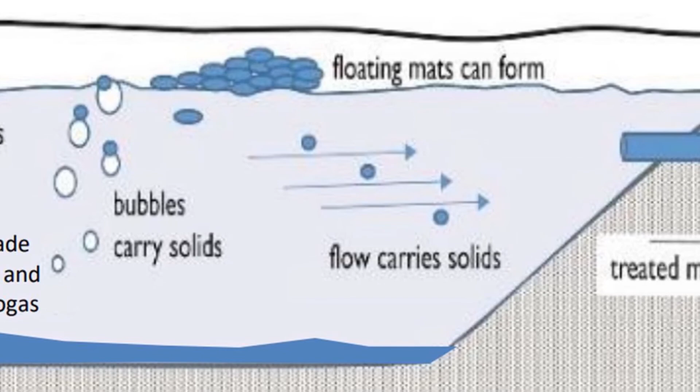Abet Company started on assisting in biogas projects construction and have gained significant knowledge and understanding on biogas concepts. Biogas is the mixture of gases produced by organic matter in the absence of oxygen, anaerobically. Primarily, it consists of methane and carbon dioxide. Biogas can be produced from raw materials such as agricultural and human waste, manure, municipal waste, plant material, sewage, green waste, or food waste.

Abet Company builds lagoon-type anaerobic biodigesters to contain the biogas produced. It is more economical, easier to repair, and may not require the wastewater to be heated, stirred, or pumped. The aged sludge and waste overflow of the biodigester can be used as fertilizer for rice fields and for watering the plants.

Aside from using it as a fuel for heating, cooking, and incineration, biogas can be compressed after removal of carbon dioxide, the same way natural gas is compressed to CNG, and used to power motor vehicles.

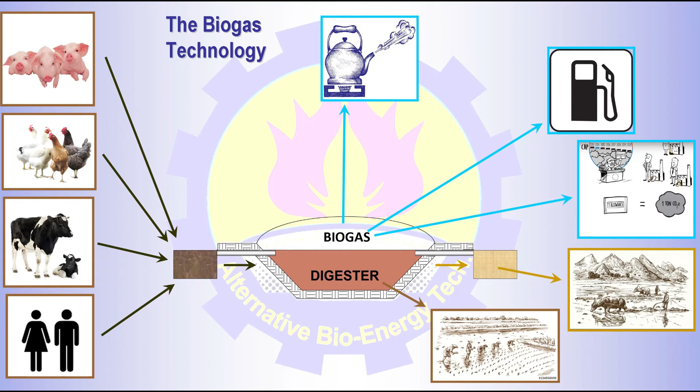In other parts of the world, the Clean Development Mechanism allows emission reduction projects in developing countries to earn certified emission reduction credits, each equivalent to 1 ton of carbon dioxide. These certified emission reduction credits can be traded and sold, and used by industrialized countries to meet part of their emission reduction targets under the Kyoto Protocol.

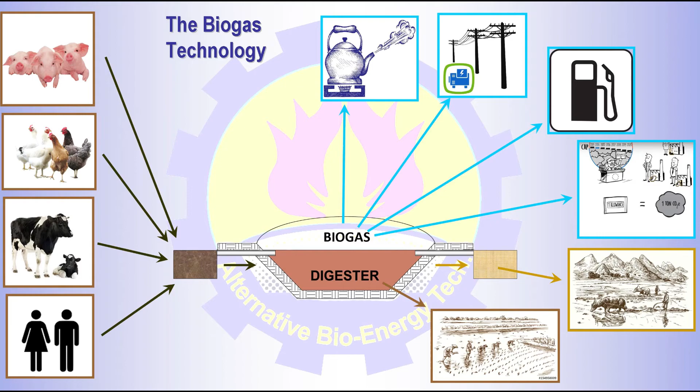With decades of experience in biogas production and installation, Abet Company became an expert in utilizing biogas for power generation. Through biogas, energy is produced in the form of heat, light, and electricity.

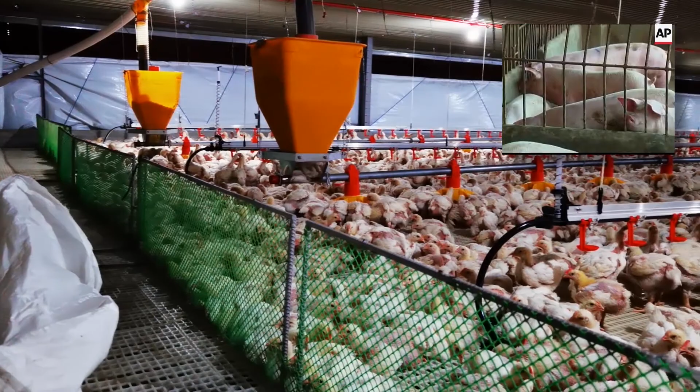Organic waste is transformed into high-quality fertilizer. With this, the volume of disposed waste products is also reduced. Since better sanitation is encouraged, there is an improvement in hygienic conditions through reduction of pathogens, including worm eggs and flies on poultry farms. Workload is reduced in firewood collection and liquefied petroleum gas, or LPG, for cooking.

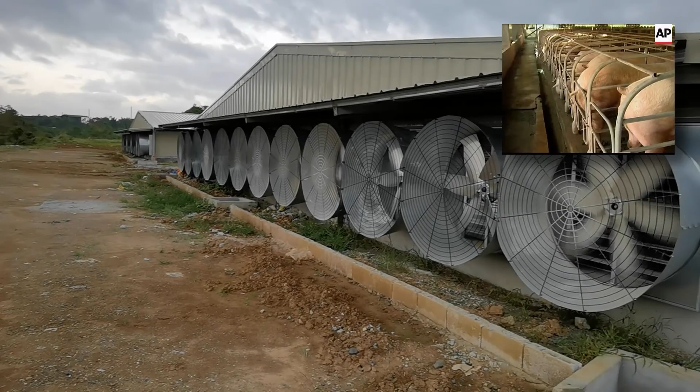Microeconomical benefits through energy and fertilizer substitution, additional income sources, and increasing yields of animal husbandry and agriculture. Also macroeconomical benefits through decentralized energy generation, import substitution, and environmental advantages through protection of soil, water, air, and woody vegetation.

The 5,000 heads of this farm can generate around 100 kilowatts of electricity to power the entire operation of this farm.

Abet Company can help you build your biogas facility, as the working crews have 2 decades of experience on more than 100 biodigester installations here in the Philippines alone.

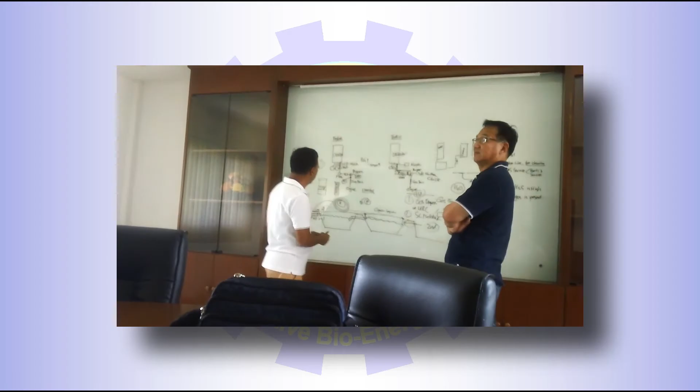Abet Company started on assisting in biogas projects construction and have gained significant knowledge and understanding on biogas concepts. In the first decade, beginning the year 2000, Abet Company has supervised and managed construction of biogas facilities in nearby Asian countries: 5 biogas facility projects in Thailand, 1 biogas facility project in Fujian, China, 1 biogas facility project in a palm and cattle industry in Indonesia, and 1 biogas facility project in a palm oil industry in Malaysia.

Since then, Abet Company have constructed several turnkey biogas projects in the Philippines. At first, Abet Company installed biogas-converted engines from Don Hardy Race Cars, a high-speed race car engine manufacturer in the United States.

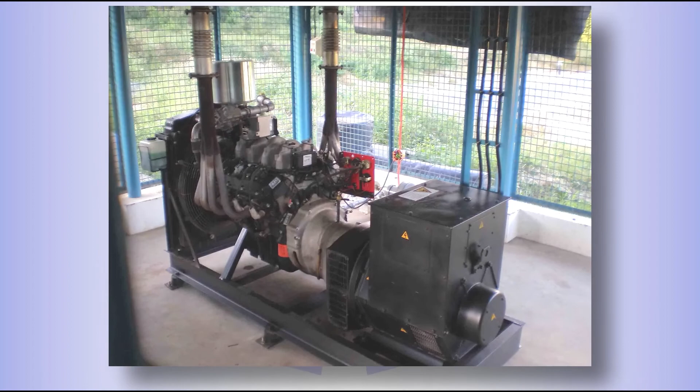Available in 75 kilowatts and 100 kilowatts, the biogas-fueled V8 engine comes with a gearbox and speed reducer, connected to the alternator.

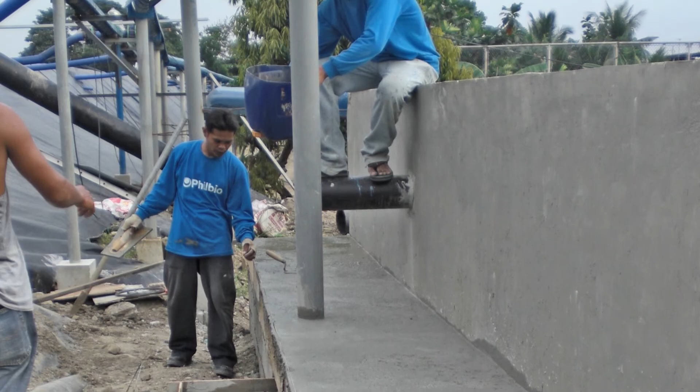Within the years 2006 and 2008, the United Nations Framework Convention on Climate Change, or UNFCCC, in pursuance to the 2012 Kyoto Protocol, with the support of Trading Emissions plc in the UK, Abet Company have constructed and commissioned 31 build-operate-transfer biogas projects in the Philippines under the Philippine Biosciences Company Incorporated, or PhilBio. During this decade, the anaerobic biodigester was described as a Covered In-Ground Anaerobic Reactor, or CIGAR, as described in the news.

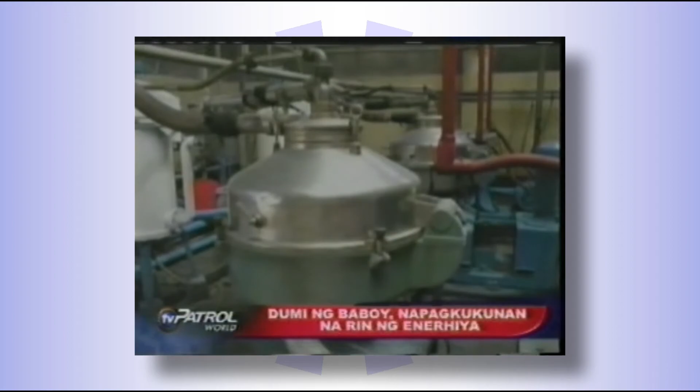We want it to come out of the digester, lose the moisture through the pipeline system that we put up, so that it can run the electric genset. Halos 80% ng electrical needs ng babuyan ay nanggagaling sa kanilang industrial waste.

Sa layuning palaganapin ang CIGAR biogas system, itinuturo na rin ito ngayon sa mga barangay.

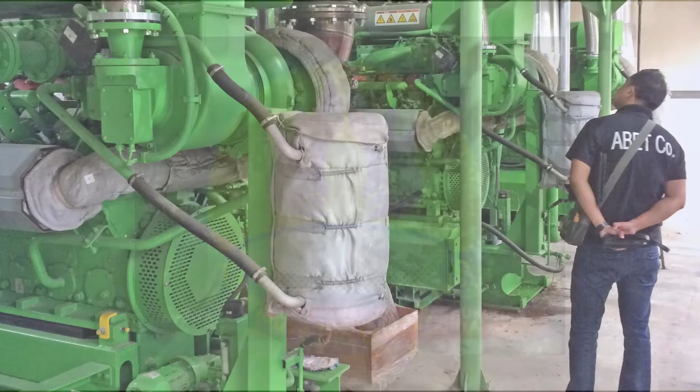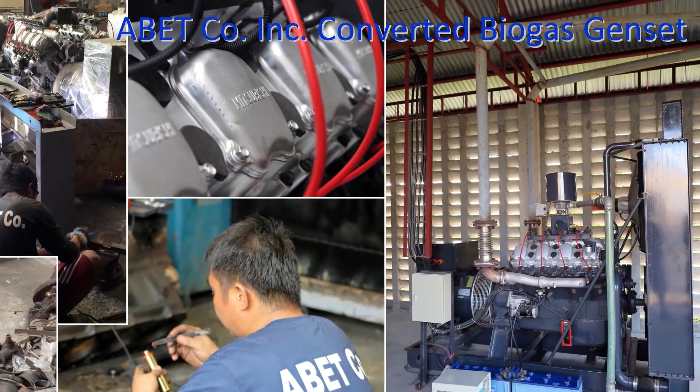With years of experience in operation and maintenance on different generator set brands, Abet Company successfully invented its own type of converted V8 diesel-fueled engine into a spark-ignited biogas-fueled engine, directly coupled to an alternator. Abet Company installed the converted engines on selected biogas projects with a generator set, rent, or lease scheme, with an operation and maintenance contract.

In 2010, Abet Company was officially established and have installed more than 100 biogas projects. Among the new biogas projects are owned by Charoen Pokphand Foods Philippines Corporation and Universal Robina Corporation, which includes the Robina Farm 23-layer chicken farm in Naic, Cavite Province, with 3 units of 200 kilowatts MAN engines-powered biogas gensets.

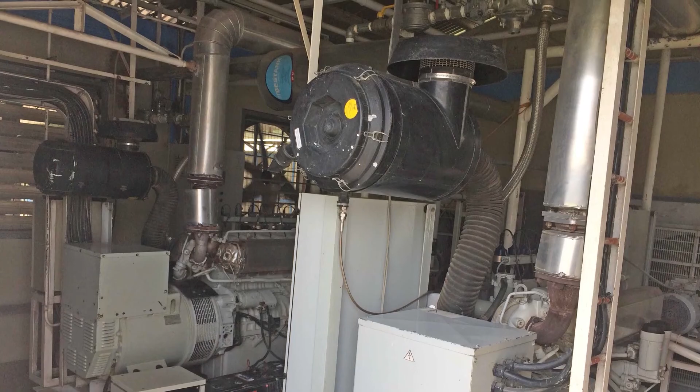In 2016, Abet Company began to offer and provide complete farm construction services, starting with a hog farm named Blue Lace Farm and a poultry farm named Strongman Farm, all located in San Ildefonso, Bulacan.

Abet Company has all the equipment and tools needed to complete an entire pig or poultry farm with a biogas facility. Heavy equipment includes 4 units of backhoes, 2 units of roller bulldozers, and 5 units of dump trucks.

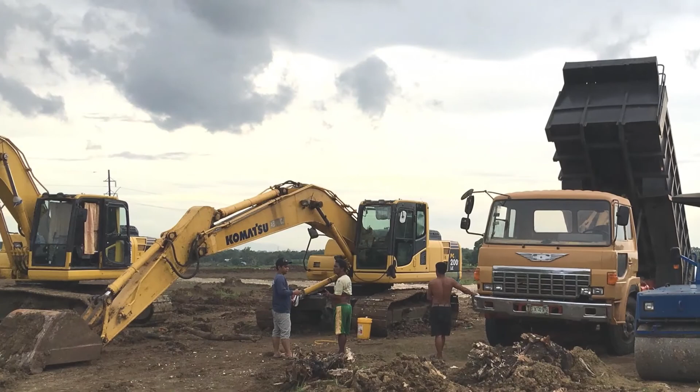In 2017, Abet Company constructed its own pig farm, the Abet Sansatero Farm Incorporated, located in Barangay Pitombayog, Mayantoc, Tarlac, and now operating with a total population of 4,800 heads, and now ongoing expansion to be 9,600 heads total, upon completion on the 4th quarter of 2021.

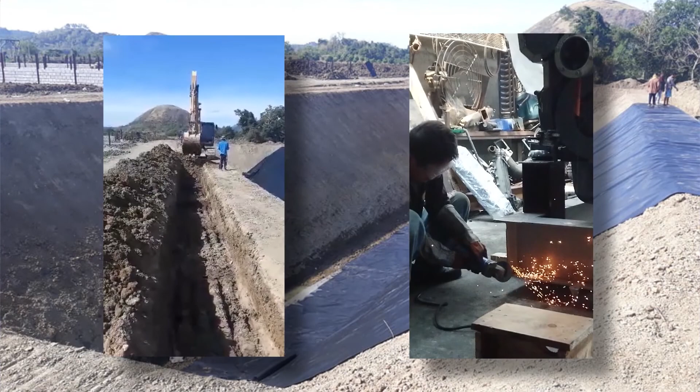This farm is Abet Company's model farm for biogas facility and for biogas generator sets testing ground. With Abet Sansatero Farm Incorporated, Abet Company has gained the confidence of clients for a complete animal farm construction and biogas facility installation.

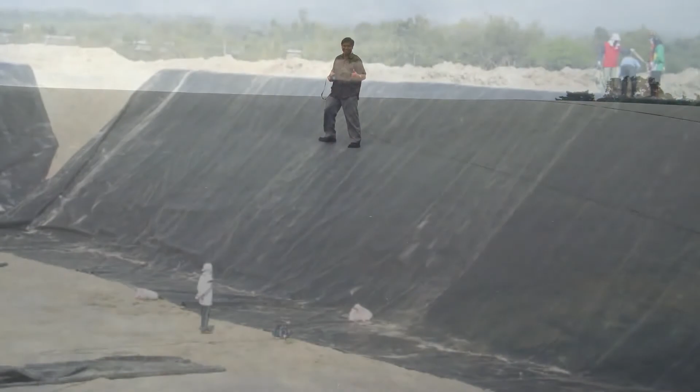Abet Company has the desirable biogas-related items, offers, and options you need for a viable biogas facility that works. In the lagoon-type biodigester, the black sheet is made of imported, high-density polyethylene, or HDPE liner.

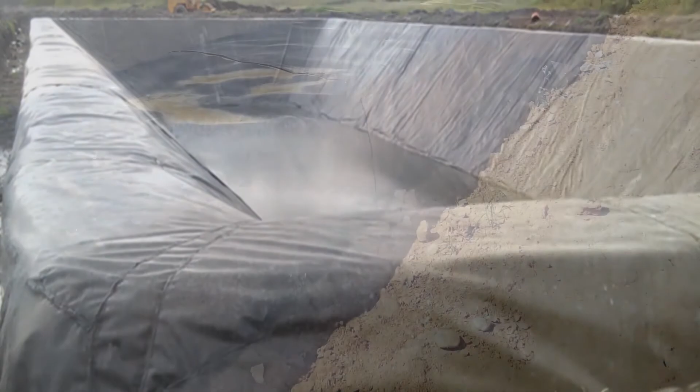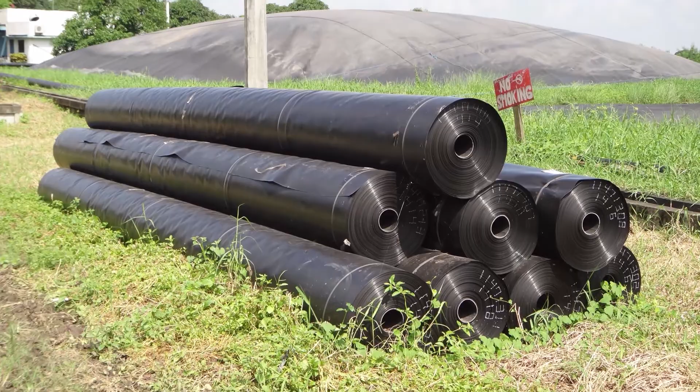Abet Company offers material and installation of HDPE sheets in thickness of 0.75 mm, 1 mm, 1.5 mm, and 2 mm.

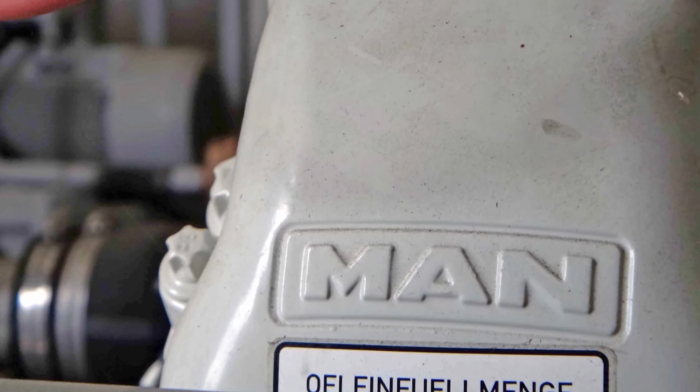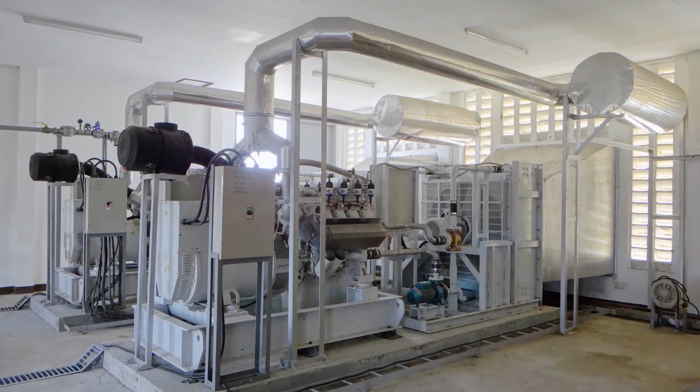For capacities over 100 kilowatts, Abet Company offers biogas gensets powered by MAN engines, exclusively made in Germany, especially designed for continuous power, 24/7 operation. The Mecc Alte dynamo, or alternator, coupled on these engines, are made in Italy.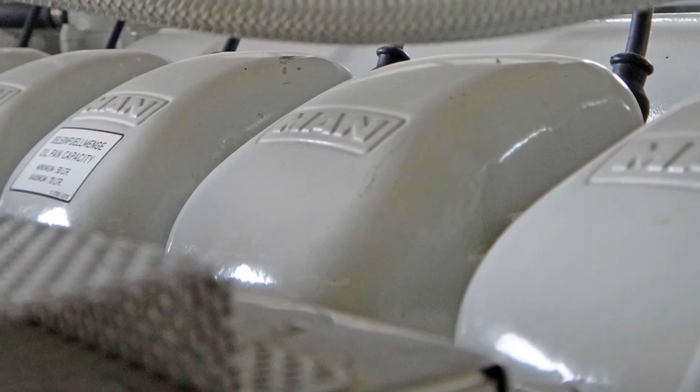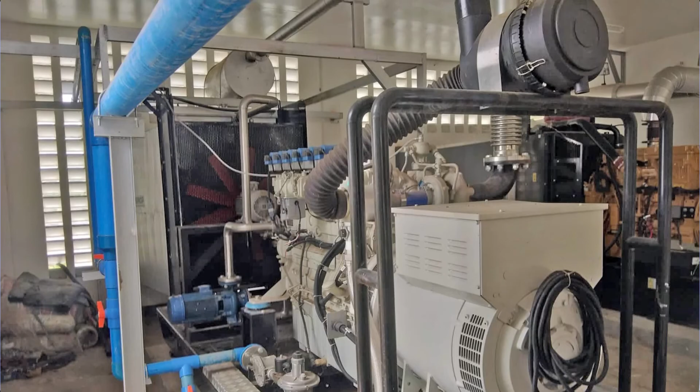The turbocharged, spark ignition, MAN biogas engines are available in the following capacities. The 130 kilowatts MAN engine, model E2876TE302, is made of 6 cylinders in line, and it is coupled with a 192 kV-ampere Mecc Alte alternator.

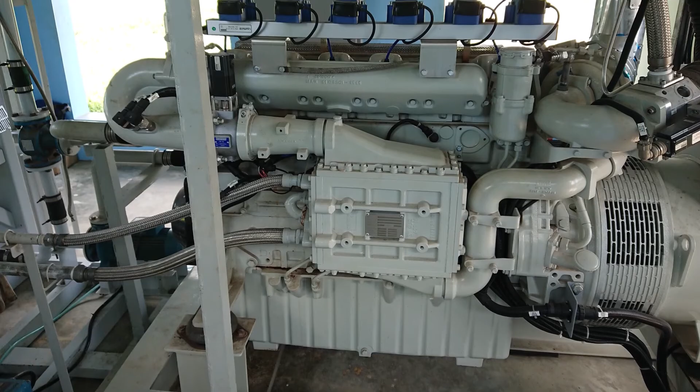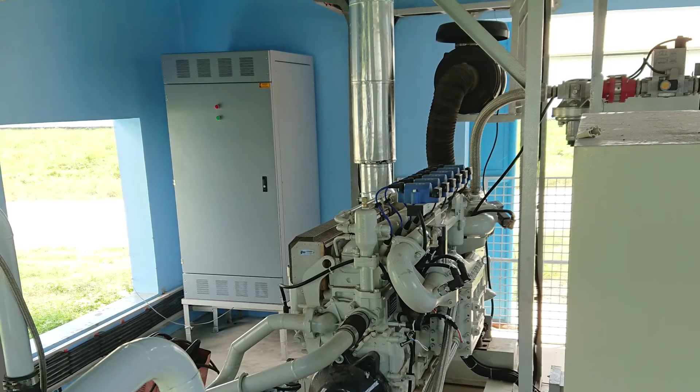Available in 200 kilowatts is the turbocharged MAN engine model E2876 E302, made of 6 cylinders in line, and coupled with a 270 kV-ampere Mecc Alte alternator, is the best seller for Abet Company.

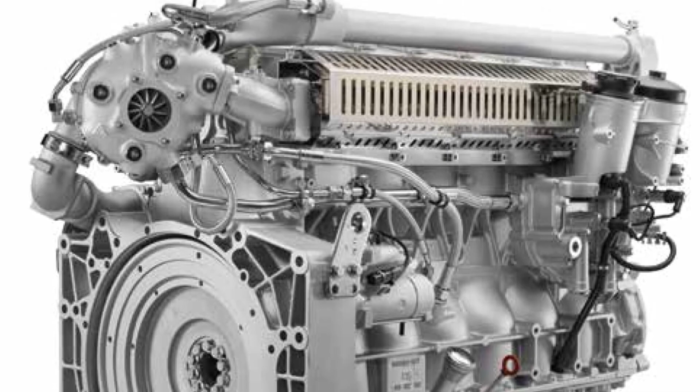The 250 kilowatts model E2676 is also made of 6 cylinders in line, and it is coupled with a 300 kV-ampere Mecc Alte alternator.

Available in 390 kilowatts is the model E3268, made of 8 cylinders and 90 degrees V arrangement, or V8, and it is coupled with a 540 kV-ampere alternator.

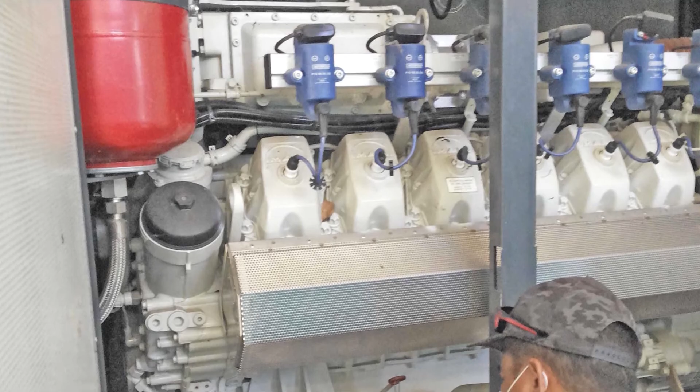And available in 580 kilowatts is the model E3262, made of 12 cylinders and 90 degrees V arrangement, or V12, and it is coupled with an 816 kV-ampere alternator.

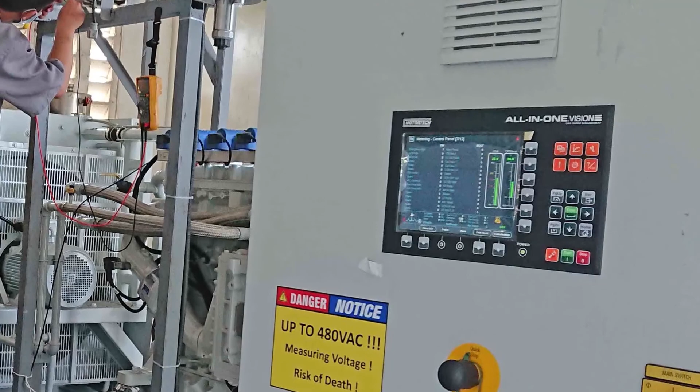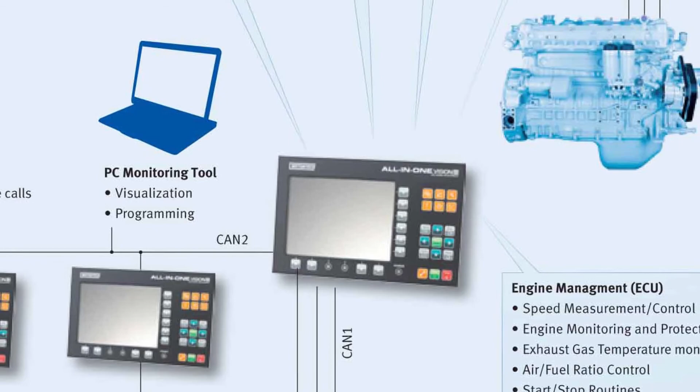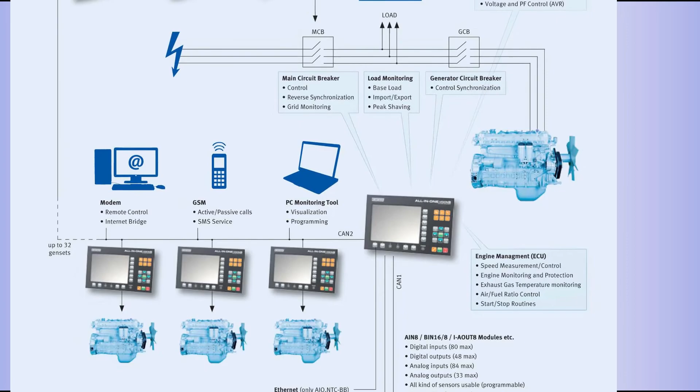The MAN biogas engines come with a state-of-the-art, all-in-one, Motortech biogas genset controller from Germany. With a large separate display, the Motortech all-in-one controller can be connected with up to 32 gensets and can integrate functions such as fully automatic synchronization or an uninterruptible back synchronization in mains parallel operation, as well as integrated solutions for multi-unit operation, load sharing, or the automatic operating hours adjustment of the individual units are standard features.

The Motortech Ignition Controller, or MIC, in versions 3, 4, and 5, provides reliable combustion on engines up to 20 cylinders, even with the weakest or fluctuating caloric values of the biogas.

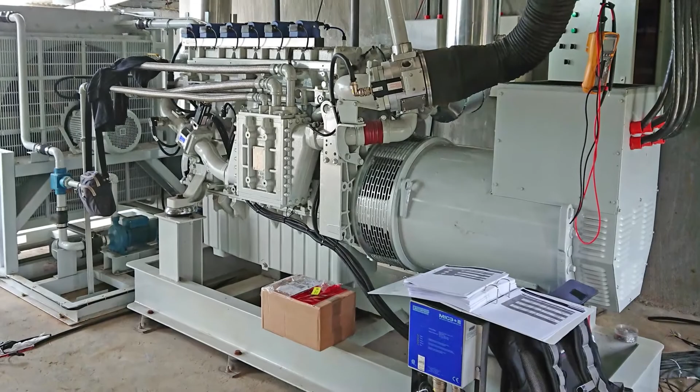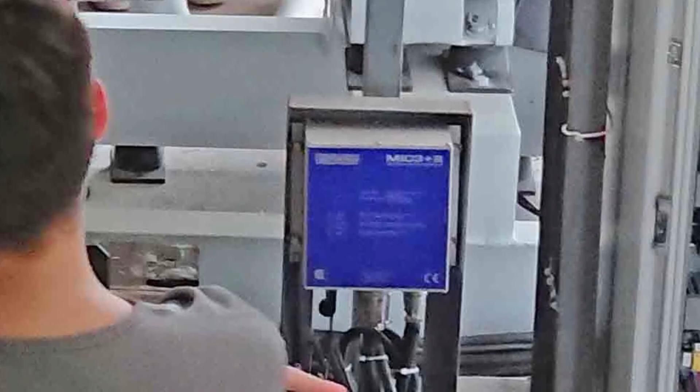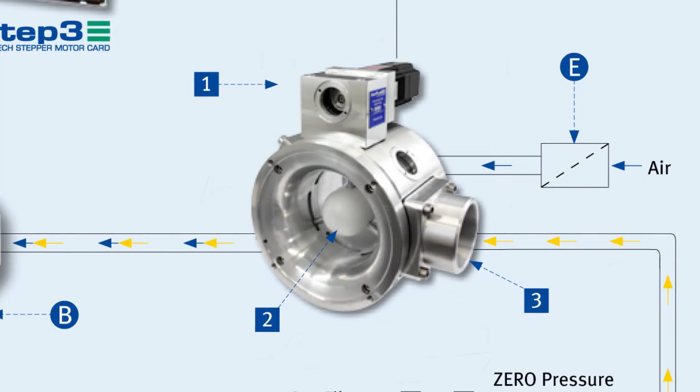The Motortech VariFuel version 2, specially designed for use with biogas engines, is a high-tech variable Venturi-type air-gas mixer that can constantly adjust to any fuel changes. The geometry of the built-in fuel ring, adapted to the application, ensures improved engine starting behavior and control of the air-gas mixture in special gas operation. Coupled to an air-fuel ratio controller, lean burn or stoichiometric, it precisely regulates the mixture.

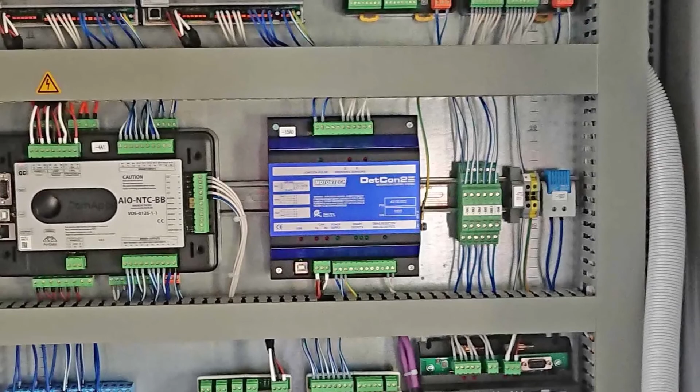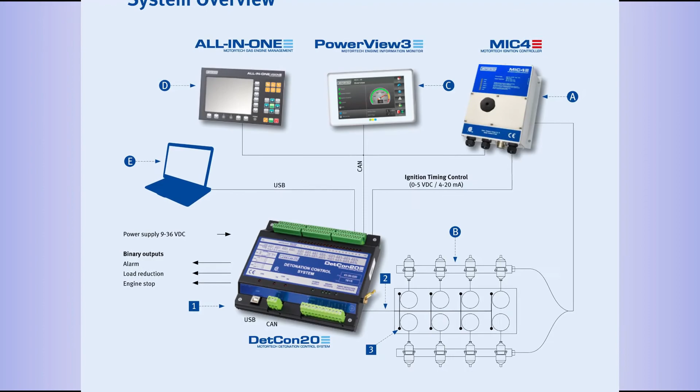The Motortech Detonation Control System, or DETCON control unit, provides complete protection for biogas engines, even with up to 20 cylinders. The microprocessor control system detects any knocking at an early stage and sends an analog signal of around 4 to 20 milliamperes, or 0 to 5 volts, to the ignition system to shift the ignition timing to retard in a linear function. A signal for load reduction, or ultimately a stop signal, is sent to the engine controller if the knocking cannot be eliminated. A controller area network bus interface is included.

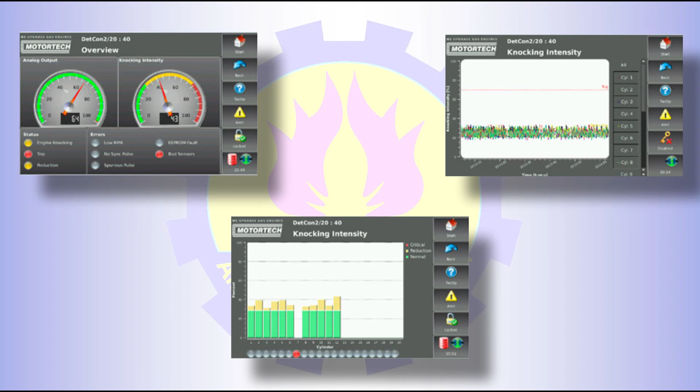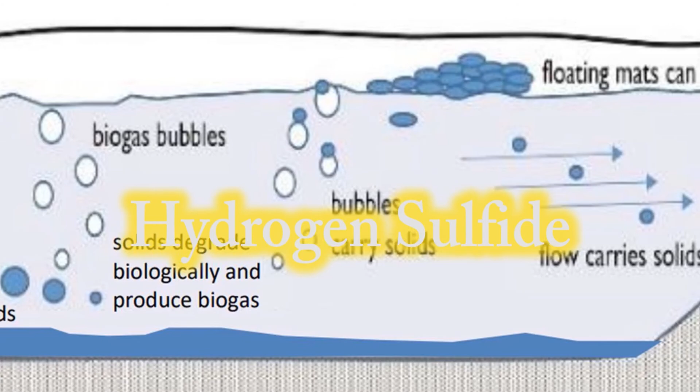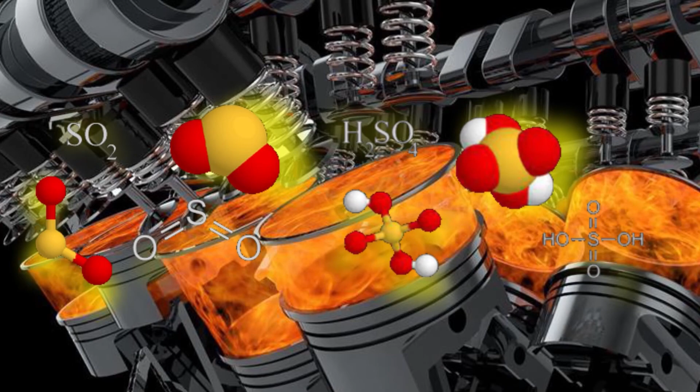However, in the anaerobic digestion inside the biodigester, hydrogen sulfide is formed due to the microbial breakdown of organic waste in the absence of oxygen. This hydrogen sulfide will form sulfur dioxide and sulfuric acid during combustion, which results in very aggressive corrosion. The corrosion will literally reduce the lifetime of the biogas genset.

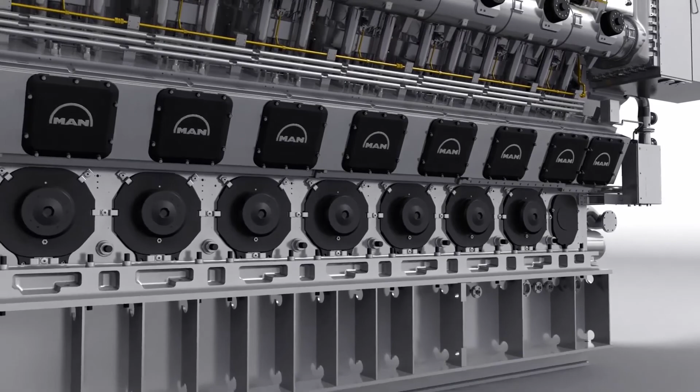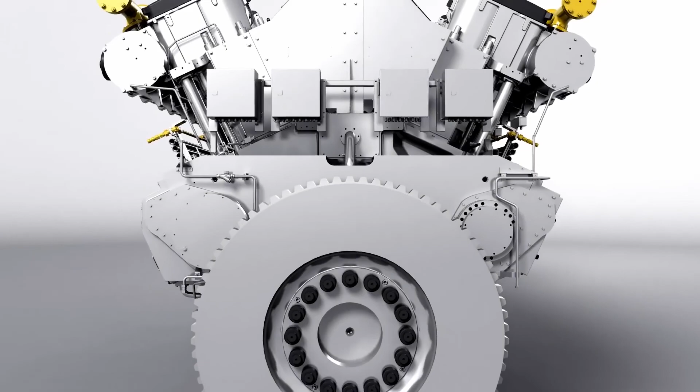This is why biogas engine manufacturers require reducing the hydrogen sulfide of the biogas fuel to not exceed 250 ppm. Otherwise, the operating costs for engine oil change, spark plugs, and other maintenance will increase significantly. Furthermore, there will be high costs for repairs and income lost during overhauls and breakdowns.

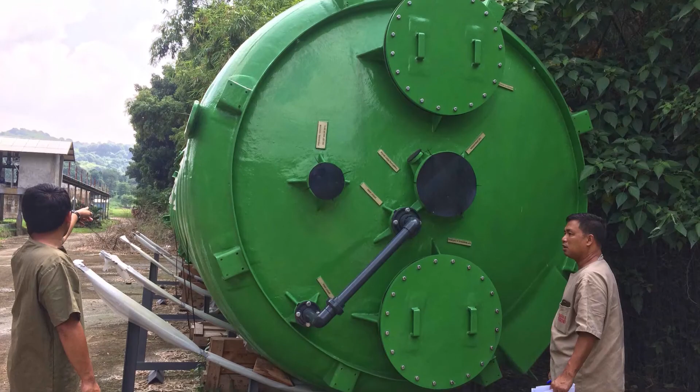To convert the biogas into usable renewable energy, the hydrogen sulfide, or H2S, must be removed. Abet Company offers an effective biogas cleaner or filter unit with technology from Denmark.

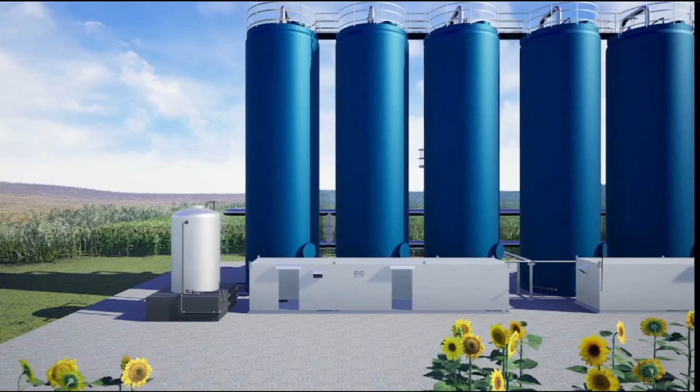The biogas cleaning process is 100% biological. The operating cost is 80 to 90% lower than a chemical gas purification system. The uptime is over 98%. Therefore, an effective biogas cleaner like this is not only financially but environmentally a healthy investment.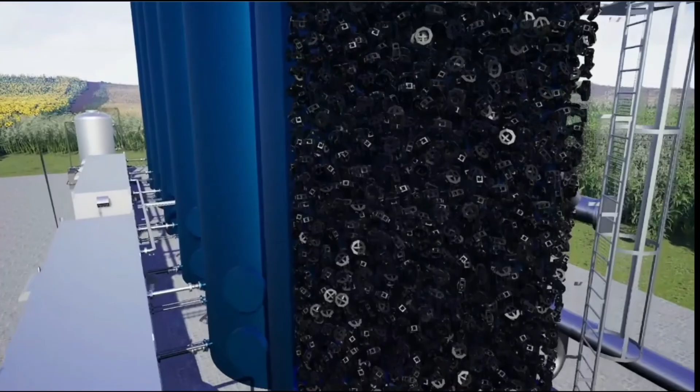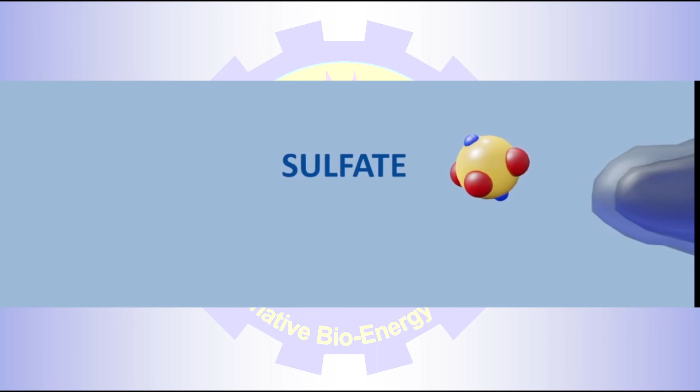Inside the tank, bacteria live in packing material with a large surface. The bacteria get their energy from oxidizing hydrogen sulfide to sulfate and elemental sulfur. That's the process needed. So how do we keep those bacteria healthy and hungry? By adding air, water and fertilizer with just the right amount of temperature.

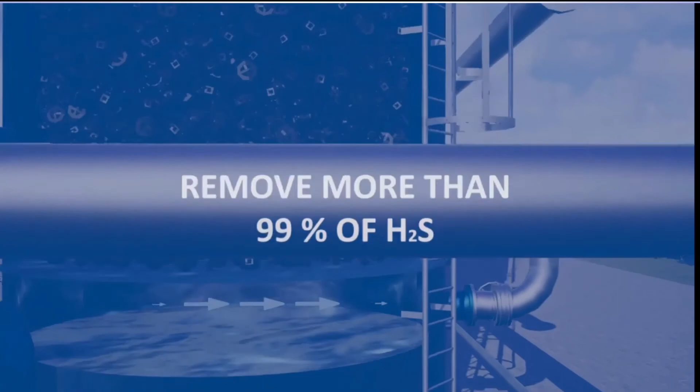At the top of the tank, biogas and a small amount of air is injected, slowly flowing down the packing material with hungry bacteria. When the biogas reaches the bottom of the tank, more than 99% of the hydrogen sulfide is removed.

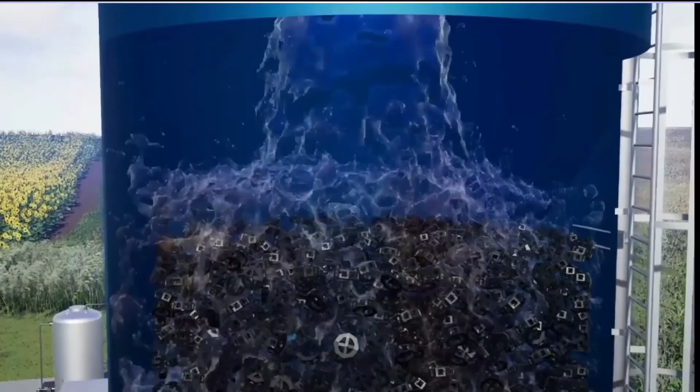The spray system supplies and recirculates nutrients which slowly trickle down the packing material. The scrubber lagoon contains sludge with sulfur and is, from time to time, drained out and new liquid is added. The result is a clean biogas that can substitute fossil fuels like oil and gas. The gas scrubber's liquid is a green liquid fertilizer that can be applied to water the fields.

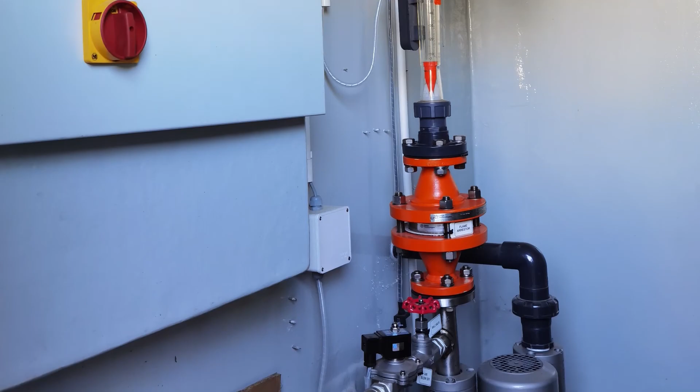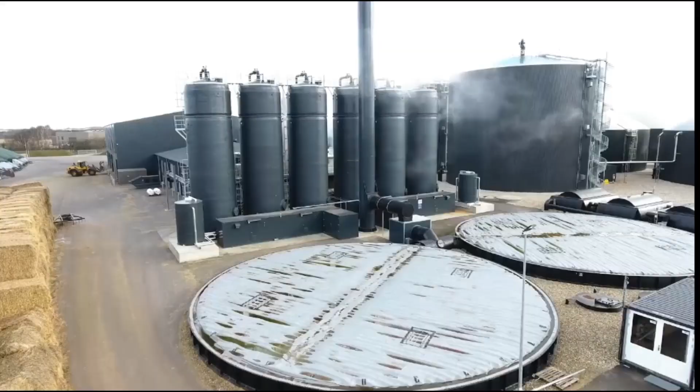The process is fully automatic. Once in a while, the packing material in the tank needs to be cleaned with a quick sludge removal system. This can be an automated task where the packing material is washed like in a large washing machine. Easy and quick.

However, after hydrogen sulfide removal, the biogas is fully saturated with water, wherein the relative humidity is 100%. If water droplets reach the cylinder heads and combustion chambers of the biogas engine, the water will destroy the oil film. This will lead to increased wear of moving parts, as well as substantial reduction of the lifetime of the engine oil. Therefore, it is necessary to dry the gas to avoid condensation in the biogas pipe system and in the engine's gas train and intercooler.

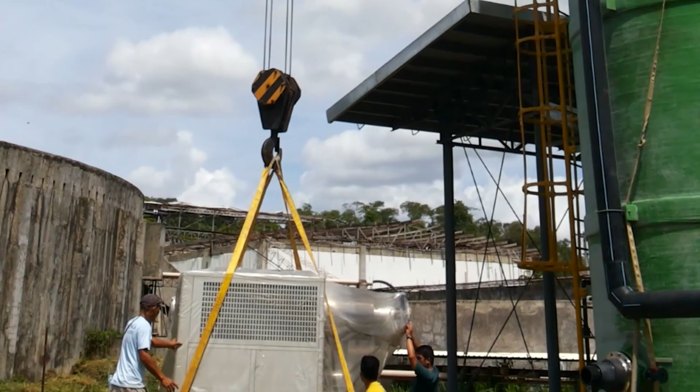Abet Company offers an effective biogas moisture remover or chiller unit with technology from Japan.

Abet Company only accommodates clients with a desirable animal population, conducive for fresh waste, animal building structure, and good waste conveyance, and clients or farm owners who have understanding of the benefits of biogas with a heart that really cares.

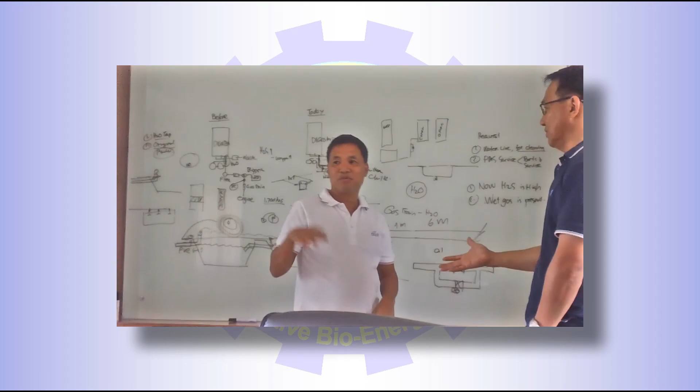Further, Abet Company now offers solar power as an alternative to the local grid energy and diesel genset on parallel electrical supply, together with the biogas genset.

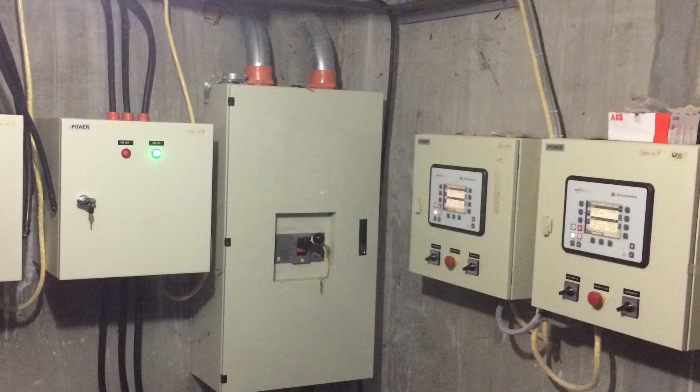Furthermore, Abet Company also offers solar street lights with solar panel capacities from 20 watts to 100 watts. A total of 28 units of solar street lights have been installed in 11 public schools in the municipality of Agu, initiated by Ms. Stephanie Ann Erigel through the local school board with the support of Congresswoman Sandra Erigel, all supplied by Abet Company.